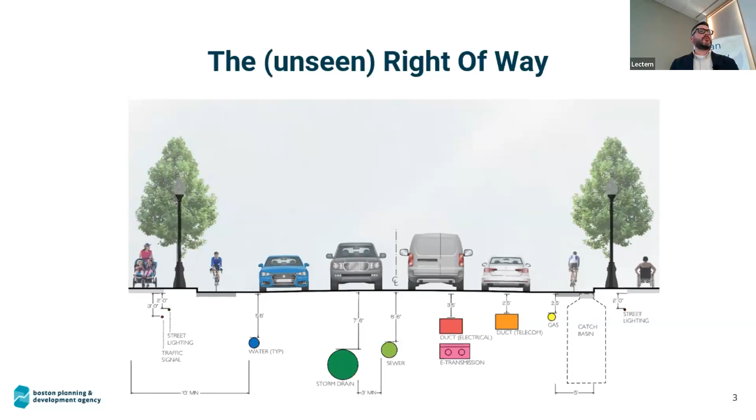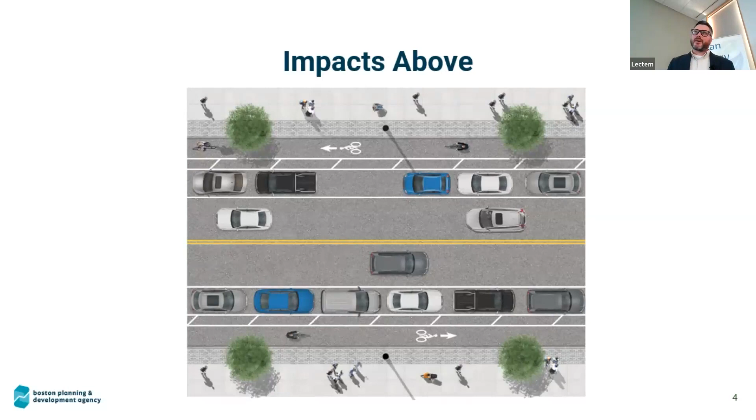Really what we're talking about is the unseen right of way. So thinking about how do we standardize or think of complete streets for the underground, especially when we have these large scale developments come online, or we have opportunities to build new city streets within Boston. Really, how does that affect and start to impact what happens above? We're looking at heat mitigation, we're looking at stormwater, we're looking at ways in which we can share curb space for multimodal transportation and other elements that occur, but that sometimes is impacted by what happens below and how things can get accessed underground.

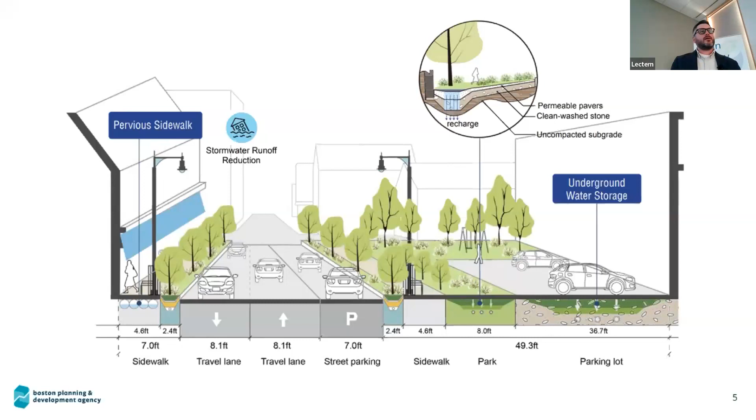But really, I think the pie in the sky initiative is to have a concept where we have lots of trees, we have lots of resilience built into the right of way, and also from the private development standpoint. So we can really start to address urban heat island, which is becoming more and more of a key issue in the city, not only in Boston, but throughout the state of New England.

How do we start to address issues around stormwater by integrating new, what we call green infrastructure practices, shifting away a little bit more from the gray principles and elevating that to the street level, using bioswales, rain gardens, tree infiltration pits, and really thinking about that in terms of how to better mitigate stormwater.

And of course, a big part of the conversation today is how does it start to focus on decarbonization or electrification in general. We know we have an electrical grid that is not so much a grid in the city of Boston. It kind of zigs and zags and goes everywhere. But how do we actually make sure and ensure that we have the capacity to decarbonize, and then having principles like sewer heat recovery that have good coefficients of performance?

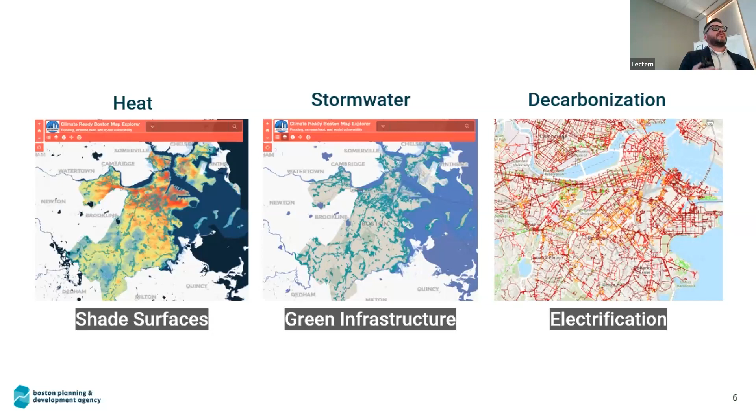We can extract more energy per kilowatt out of that and start instituting that into buildings, and then look at that from a lens of environmental justice as well. So if we have capacity issues in a certain area, we can elevate key principles of building electrification and decarbonization at the same time.

A lot of my work falls into two buckets. The first bucket is the smart utility standards, and I'll discuss those first. The second is the smart utilities policy for Article 80 review. This is where we capture any project coming through the pipeline that's 50,000 square feet or above. They have to start looking at key policy and regulations through that review process that we take in, analyze, and then work with the proponent on.

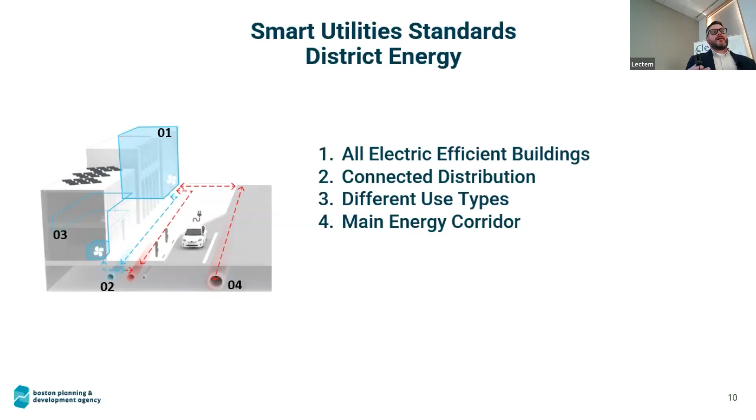So the smart utility standards. The biggest one we look at, which I'll talk about more in detail later, is this district energy, or what we call advanced energy concepts. This applies to projects that are 1.5 million square feet or above. A large scale project comes with a master plan, typically adding new street networks. What we're trying to do is figure out how to cluster buildings into an all-electric efficient concept, and how we can connect that to the distribution. How can we incorporate different use types? And then how can we think about providing an energy corridor? So we have this new street network going in, and we're starting to think about how that duct bank functions underneath the street.

For projects that are 100,000 square feet or above, we look at green infrastructure best practices. We're starting to work with our green infrastructure director and the streets department on standardizing best practices for the right of way. I think this is a key concept for us when we look at utility site plans, ensuring there's no conflicts with laterals coming in, and making sure these elements in the right of way can thrive and stay green, grow, and also provide this kind of subline engineering component of stormwater capture.

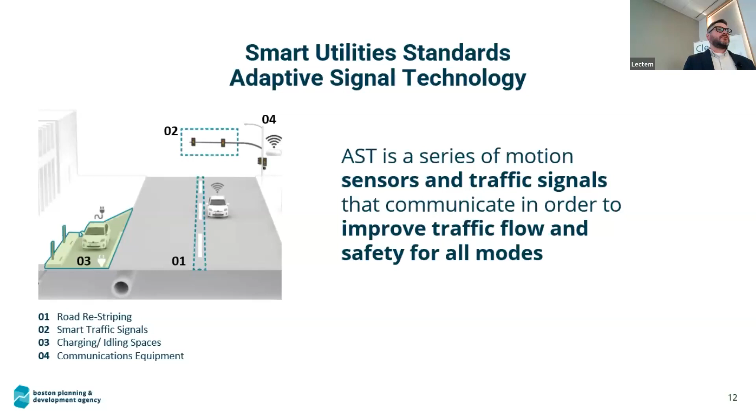We also look at adaptive signal technology. So when I talk about complete streets for the underground, it's really thinking about complete streets for above, and how we start incorporating pedestrian safety through shadow conduit, providing access to sensors, deploying those throughout our street network.

And then that also rolls into smart streetlights. We actually just did a full city audit of the 76,000 streetlights that the city of Boston has under its purview, where they are, what conditions they're in. We have a geospatial map, and then we can start thinking about what other elements we can add on to that streetlight network as they start to transfer to newer technologies, better LED, that sort of thing.

Another key principle we look at on a large scale, for the 1.5 million square feet or above, is this concept of a telecom utilidor. This really gets back to thinking about equity principles, access to broadband, new technologies. We all know that no one likes to share the same conduit. So what happens when a new provider comes in, and we want to make sure that duct bank is in place, to keep business as usual functioning throughout the city. We don't have to open up the streets to do all this.

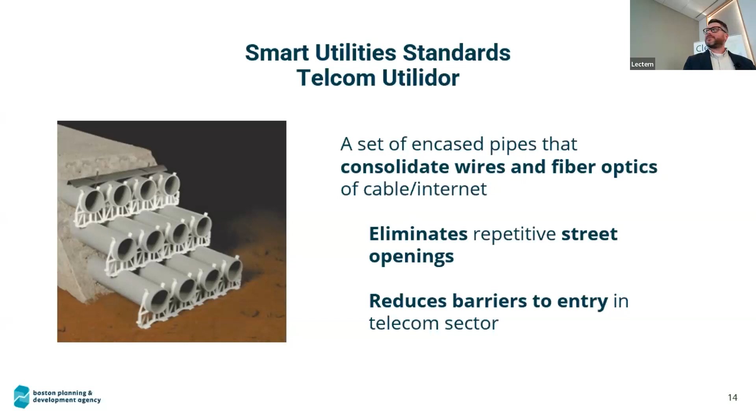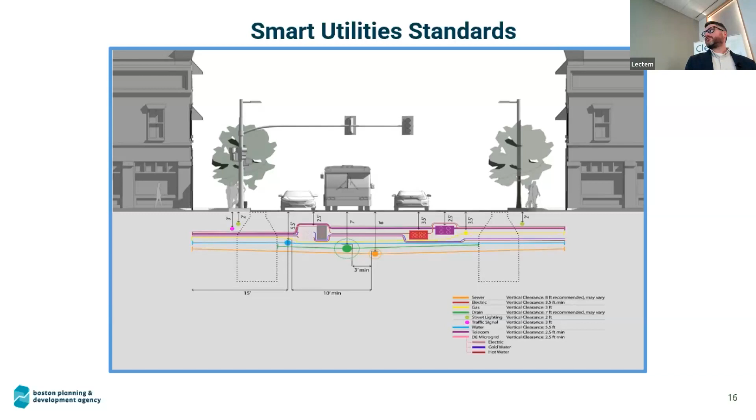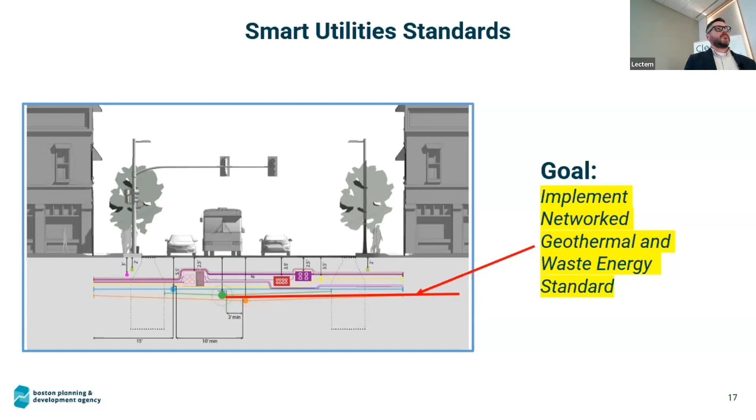What we are missing, you'll see, is something around thermal decarbonization. As we start to look at our smart utility standards, we incorporate these duct banks, telecom utilidor, but we're not really addressing the thermal aspect yet with these laterals or potential other connections we can make out of the existing sewer or newer technologies that might come online. So that's one of our goals, how do we start implementing a key strategy or standard around this, working with our state and quasi partners at Boston Water and Sewer. How can we start incorporating this into our better practices of street networks?

This starts to really get unpacked within the second bucket, the article review, which we call advanced energy and advanced feasibility assessments. Part of that assessment starts to look at a clustering of these technologies.

Did I just lose my mic? No, yeah. Maybe it's the battery. Oh, that's not good. No, that is good, okay. I can move that over. Sure.

Let's see. Lean in here. It's actually pretty sensitive. Just leave it there. Okay, we can talk now. But for the people in the back of the room, you do need to speak.

So what we look at with these advanced energy feasibility assessments is listed out here. I love the conversation this morning around how do we actually layer on co-beneficial strategies for renewable energy. It's not just about sewer heat recovery or waste energy recovery, not just geothermal, not just PVs, not just batteries. It's about how we look at that in a holistic context of infusing that into a potential project.

We're actually granted the opportunity with projects of this scale to start investigating those principles. So we look at low temperature thermal loops, geothermal technologies, the sanitary sewer, black water, or seawater heat exchanges, since we're a coastal city. Vehicle to grid is something that's coming online. We actually have about one nuclear power plant's worth of lithium ion batteries existing in cars today. That is something we could tap into in the future.

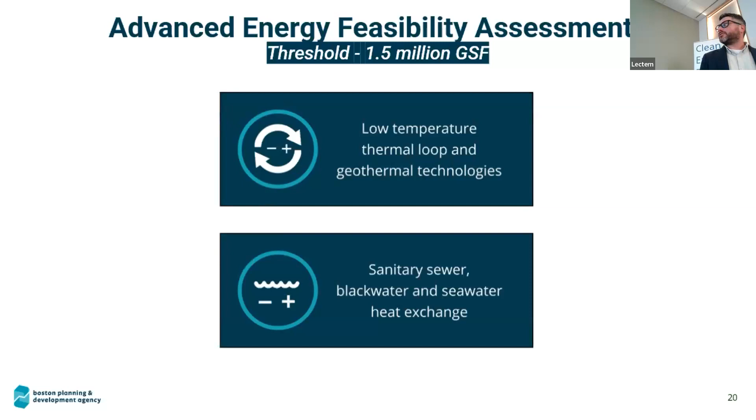So the focus today is on wastewater energy, sanitary sewer, these low temperature ambient loops. And what we ask projects to do when they come in is really to do an analysis of the regulatory context they're working within. So looking at not only what the city of Boston has, the BPDA for zoning and regs, but also what's at the state level and what are some other regulatory issues or hurdles that might be in place that we want them to flag, so we can potentially help work with.

And then that helps establish the baseline case, so the business-as-usual case of just doing the building as is, as a standalone project. Then we talk about how that can integrate and connect with the existing utility infrastructure. From there, we work with the teams to start developing proposed strategies. They'll have identified some key areas of interest based on existing conditions and analysis, and we'll have a good understanding of what the potential carbon emissions are for the project.

We'll know what the various load typologies are within the project. So if there's a lab component with office, and then residential, we love it if there's a grocery store there because there's potential to capture that heat. If there's a pool involved, if they want to do an ice skating rink, all these things we can start combining and thinking about in terms of shared load capacity.

And we'll identify key technologies to investigate. What we've done a lot recently is actually looked at waste energy as a key strategy for them to study. Then they come back to us with this feasibility report to get an understanding of what's the cost benefit analysis, what's the ROI, is this actually going to happen, what incentives are out there, all that fun stuff, and compare it to the base use case.

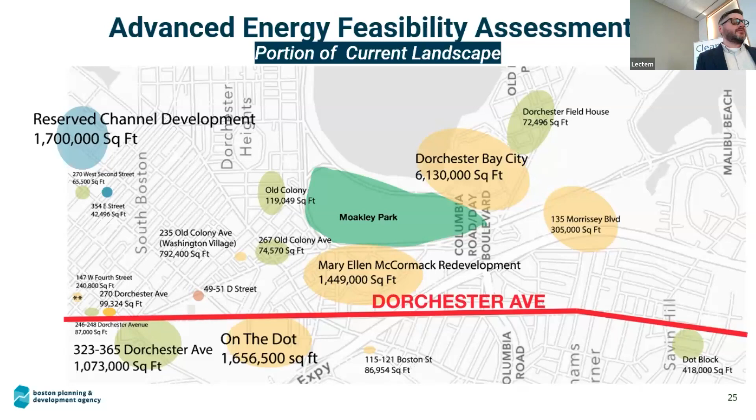And then how do we expand capacity and resources for this within the city and within the BPDA? How do we increase capacity overall for electrification more broadly and fuel switching as we start to look at BERDO and retrofits and tying wastewater energy into that concept? How do we develop policy for these new waste energy technologies? So, working with our partner agencies on thinking about a framework for that.

Maybe it's using the advanced energy feasibility assessment that we have as a baseline, but tweaking that to align a little bit more with thermal decarbonization. How do we increase pilot opportunities? I look to the state partners on that one. And then, maybe we can think about how we incorporate that into new construction projects.

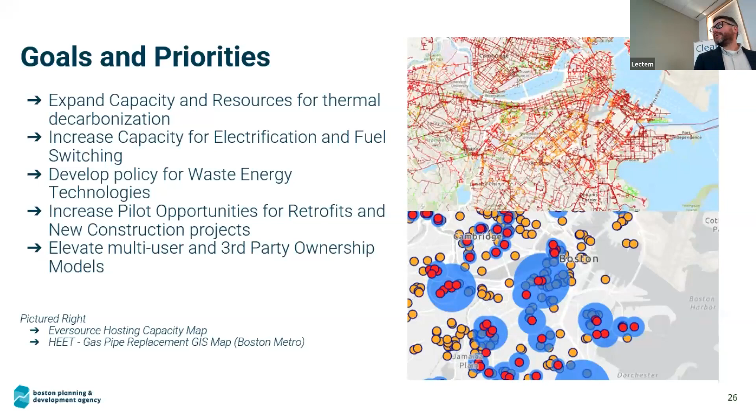And then how do we work through this multi-user or third-party ownership model, which has been out there and has shown success from an ROI or proposal perspective that we've seen in the past. So you'll see here, this is just our electrification map, and then this is HEET gas pipe replacement map. And you can see that it's really a network of things that we can utilize and tap into.